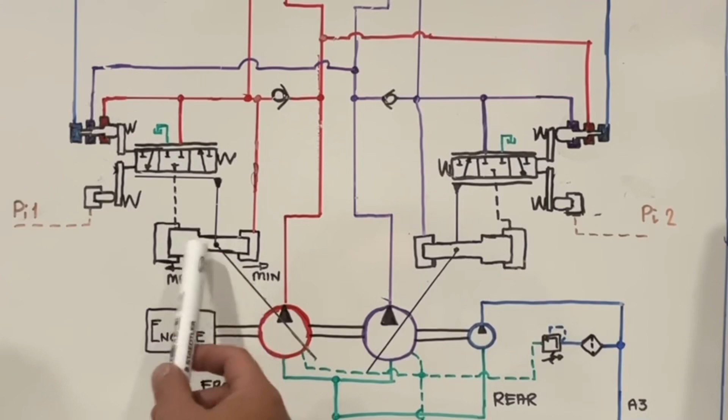This front pump here is variable. These two pumps are variable swash plate axial piston type. So this one here is the stroke piston, or servo piston, you call it. So this is the stroke piston, this one here, the stroke piston.

So there's a large area here and the small area. And we have here the regulator side control. So this is part of the regulator.

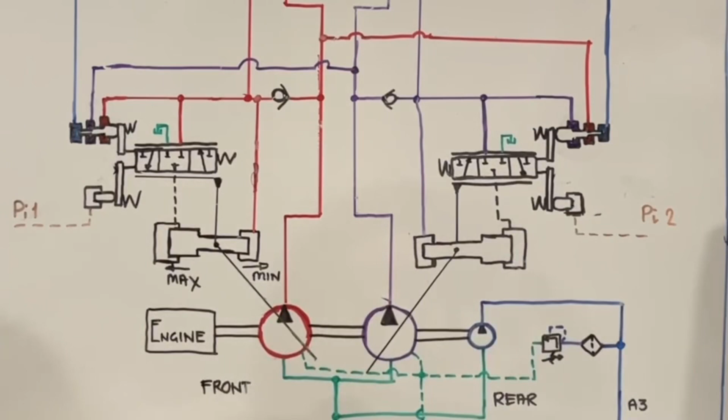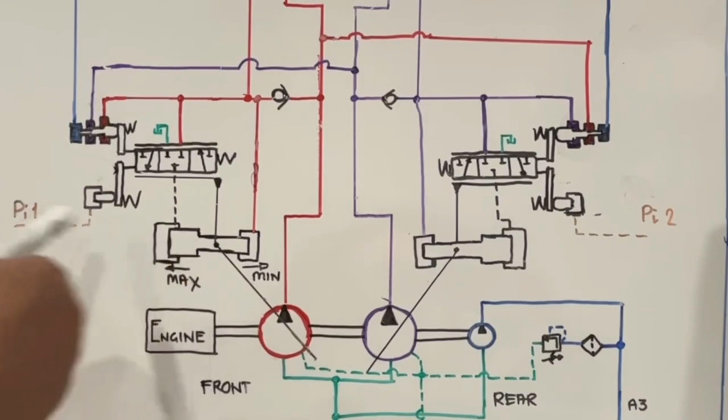So this one here is your servo spool and sleeve. This controls the tilting angle of the pump if this one shifts. This one here is the feedback lever, so it's attached to the stroke piston. Okay, so I will show you that one.

So this is the stroke piston. This is the small area here, and this is the large area. This is the lever, this is the feedback lever, this one here. So this one is attached to that pin, okay, like that.

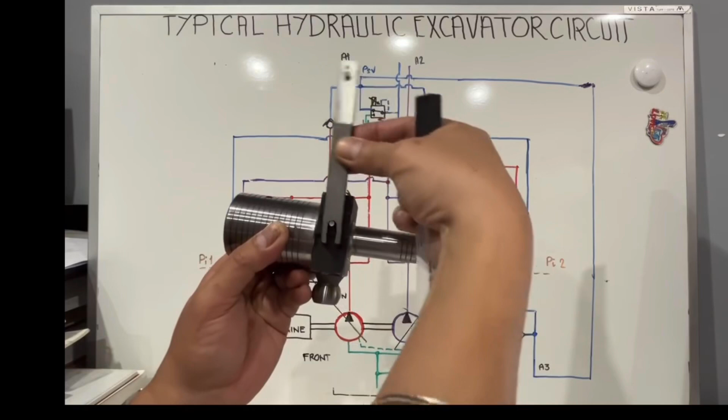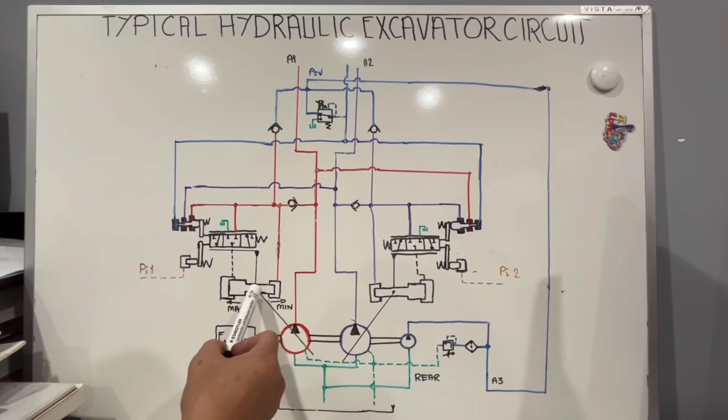Okay, so this is the stroke piston. This one here is where the swash plate connects, or the cam connects. So that's the feedback lever, connect to the servo or stroke piston. This one here, I use the small pointer.

This one here is your flow control link and spring. By the way, this spring here is adjustable. That one there is adjustable. Same here, you can adjust that spring.

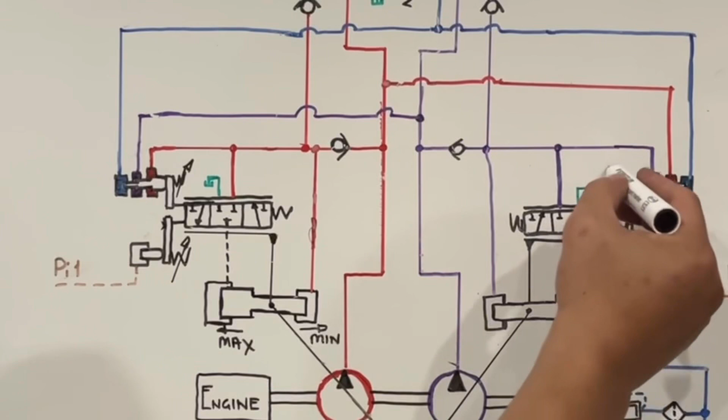Okay, so this is the link, flow control link, and this is the power link. Spring adjustable. So there's an inner and an outer. There's an inner, there's an outer spring. That's how you set this, that spring sets your power curve.

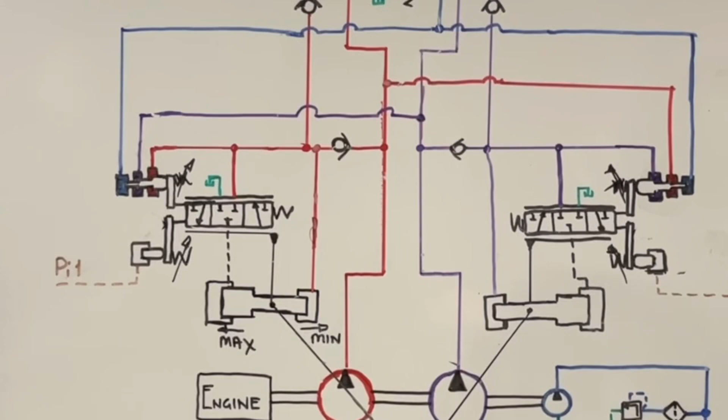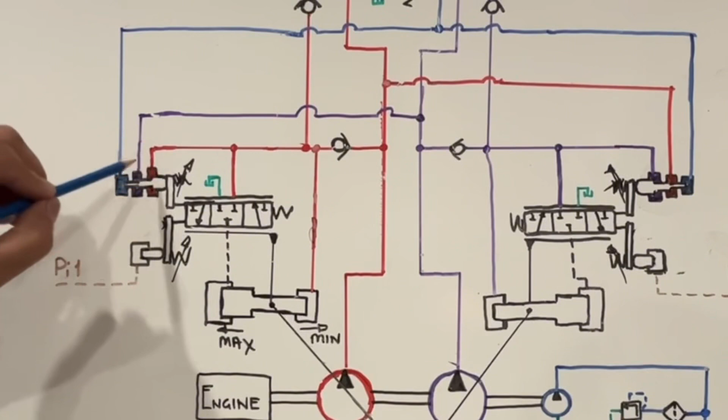This one here is the pilot piston, and this signal is your pilot pressure. This one here is the power link. This control here is your power control. So you have your sleeve and spool.

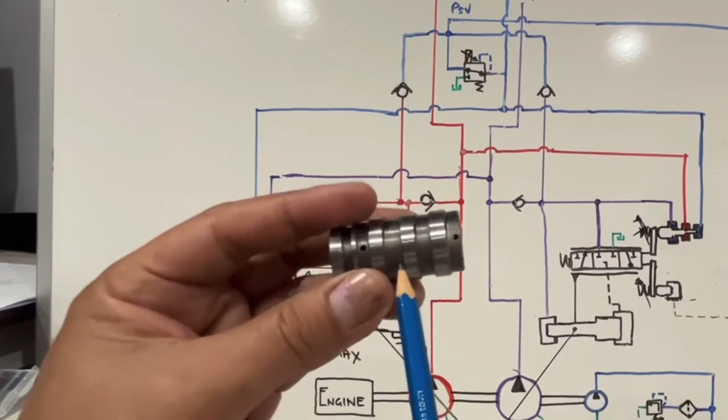Okay, same on the rear, so I'll show you that one. So this is the sleeve, this is the sleeve. So this is the land here for the front pump, rear pump. This land here, see there's a hole, there's a drilling. See that drilling?

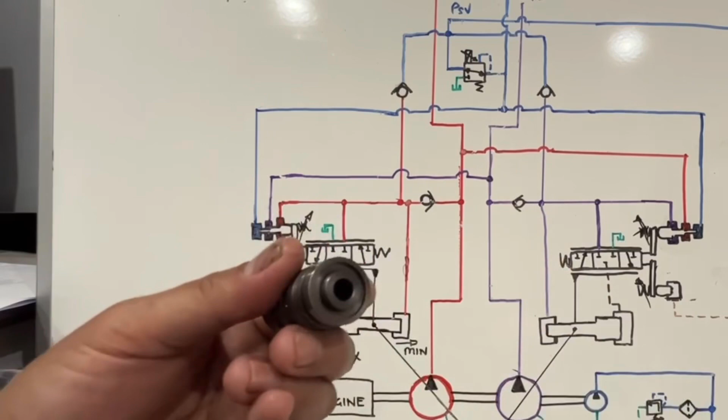So front pump pressure, rear pump pressure. So if you go to the rear, this is rear pump pressure and front pump pressure. Now at the back here, that is your power shift. There's a bore and there's a piston.

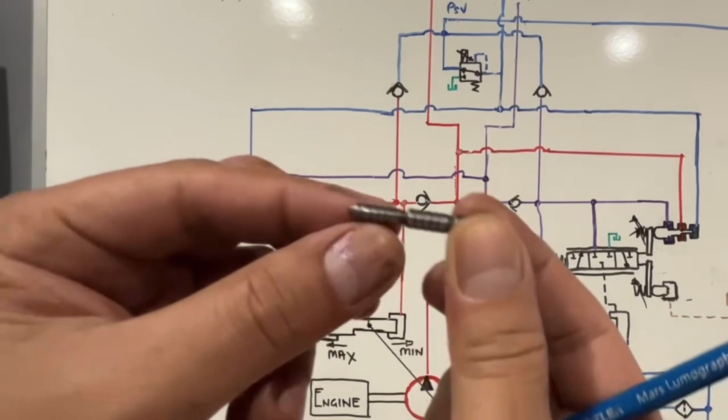So this piston here has different sizes, depending on the power curve. So that one connects here. So when there is pressure acting here, this spool moves and then pushes this spool. So this is the spool. So this area here is the front pump pressure, and this area here is the rear pump pressure.

So if you go to the rear pump control, this area here is the rear pump control, and this is the front pump control. So it is called a summation multi-land spool and sleeve because it has a companion pump.

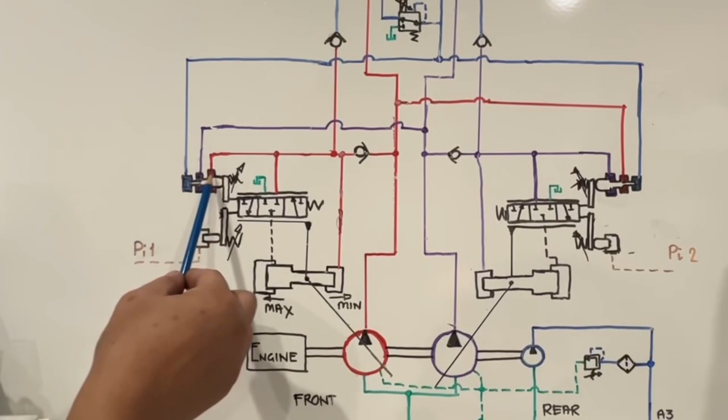So this is the spool. So the first land, if you're looking on the front pump, so the front pump pressure, if you follow the circuit, check valve and then see, so when this pressure is higher than the servo pressure, this check valve will open and this check valve will close.

So this check valve here on the K3V small displacement, if it's not fitted in the regulator, it's fitted in the pump head. So there's two checks, one at the head, one at the side here. There's two checks, okay.

This is the front pump area, and this is the rear pump area, and this is your power shift area here, which is from your proportional solenoid pressure reducing valve. So this one here, there's a solenoid.

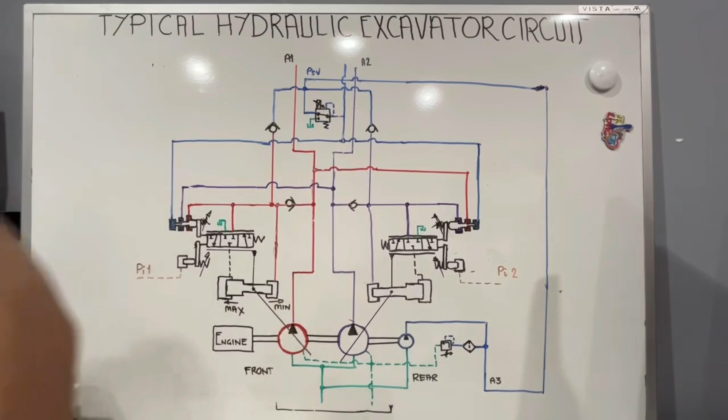When there is a solenoid, that is a proportional pressure reducing valve that controls your power shift, okay. Same also on the rear. So this one here is a variable horsepower control because it has a power shift command.

And then this control here, this flow control, is a negative flow control. So negative flow control, when the pilot pressure increases, the pump displacement decreases. Remember, if it is a negative flow control type, the pump displacement is inversely proportional to your pilot pressure.

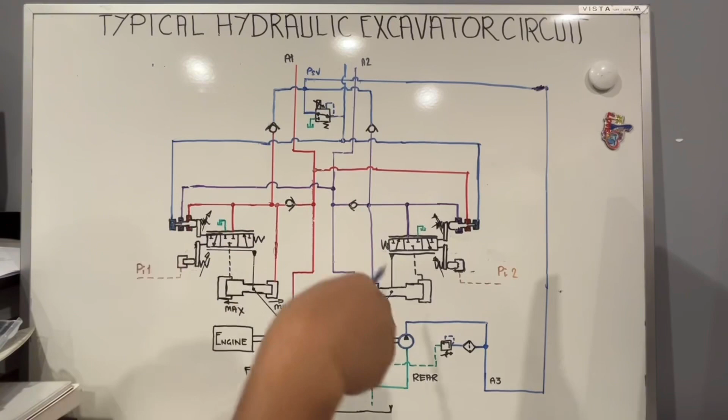So how do I know it's a negative flow control type in this circuit? Because of the link. See this link here? When you see a diagram like this drawing, front and rear, that's a negative flow control.

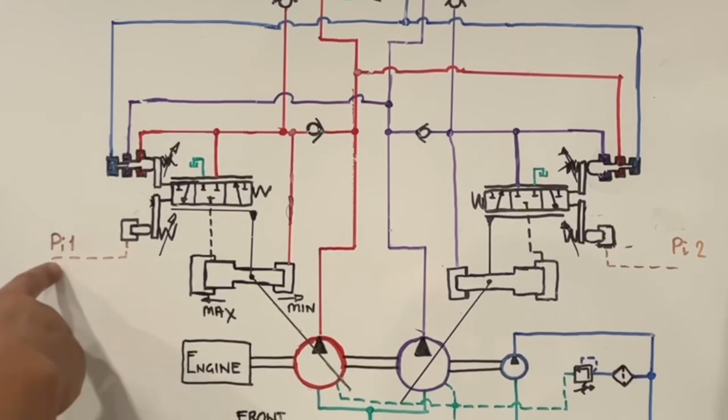When it is a positive flow control, that's a difference. The pump displacement is proportional to your pilot pressure. A positive flow control type has a fulcrum here, there's a symbol drawn like that. Same also on the rear. So if you see a symbol like that, it is a positive flow control type regulator.

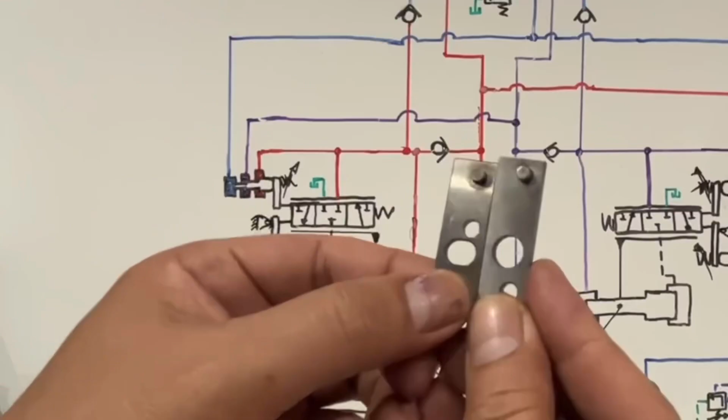So I show you the links, these links here, I've shown you already. So this one here, this is a negative type flow control link. So when the hole here, this is where the link locator is located.

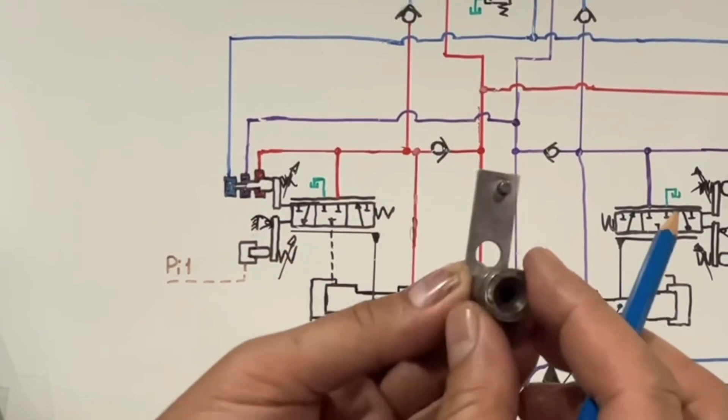When you see this link locator, it has a chamfer. When you install this on the regulator, it's like that. And then next to that, if you see a regulator, there's one like that.

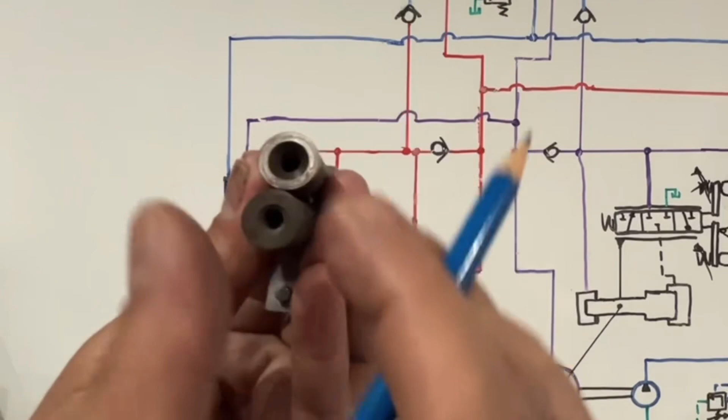So if the chamfer is on the top, remember there's a circlip here. A normal regulator has a circlip, but the other type of regulator is a plate type, so you can't see it. If you want to double check, you just remove that plate. So if you see a chamfer on the top, that is a negative flow control, because the hole is on the bottom.

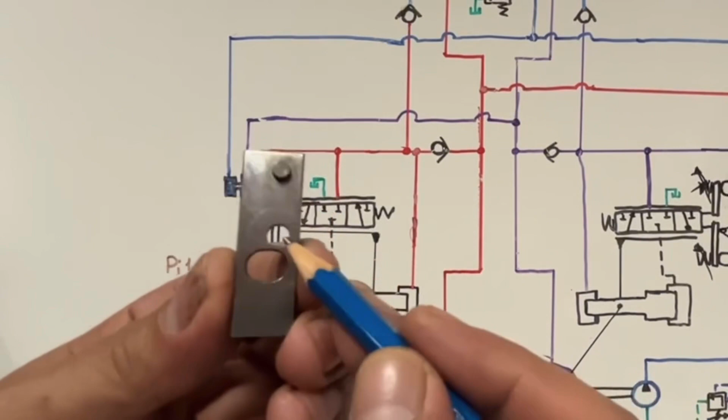When it is positive, this is the positive type. The small hole is on the top. So when you put the link locator, it goes like that. When the chamfer is on the bottom, that is a positive flow control. Remember that.

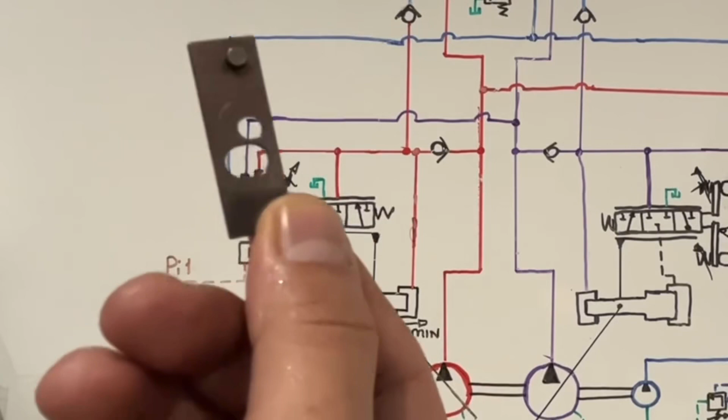So that's a positive link, flow control link. That's positive, and this is the negative. On the circuit, they put a distinction, they put a difference, so you have to meticulously check the drawing. If you miss that, you miss the control. So this one is a positive flow control type, and there is a fulcrum.

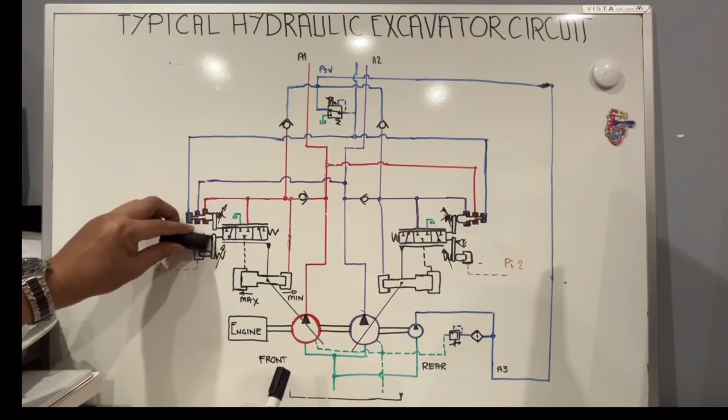This is very important, I will explain that later when I explain the flow control. For this time, I just give you an overview of the diagram. So let's put negative flow control first. Okay, I think I've covered everything.

So this controller or regulator, the code of this one is normally K R, and then depend on what size of the pump, 112, 63, or 140. So let's put X first there, because let's say we don't know the size of the pump.

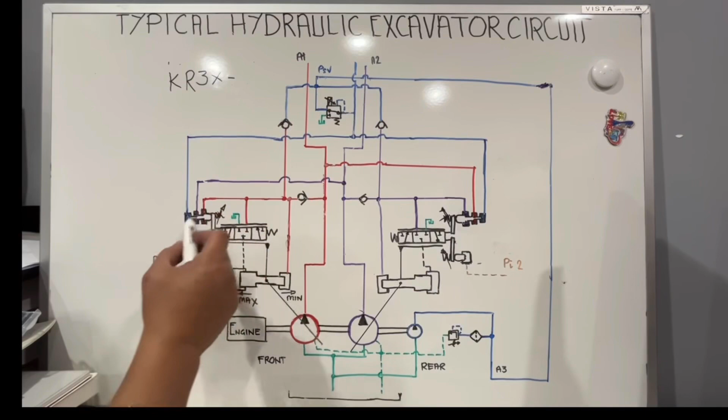So, depend on how much milliamps you put on that solenoid. Because it is a variable, so 9, and because it is a negative flow control, so N. That's the code of the regulator. If it is positive, P.

So if it has a flow max that is 2 stage, when the maximum flow rate is 2 stage, so C. So two stage flow, maximum flow type.

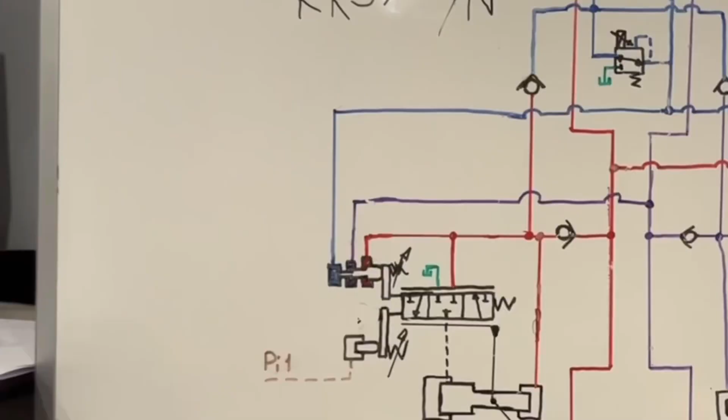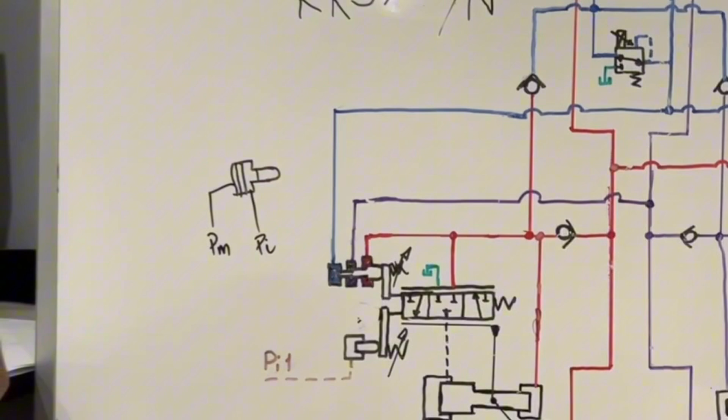The symbol here is not like that, but kind of like this, I'll show you, like that. And then there's a piston. So this one here PL, and this one is PM. So when you see a symbol like that, there's a link here, and then a spring. That's a 2-stage maximum flow control.

But this one here is a normal only, but it is a negative flow control, because of the link symbol.